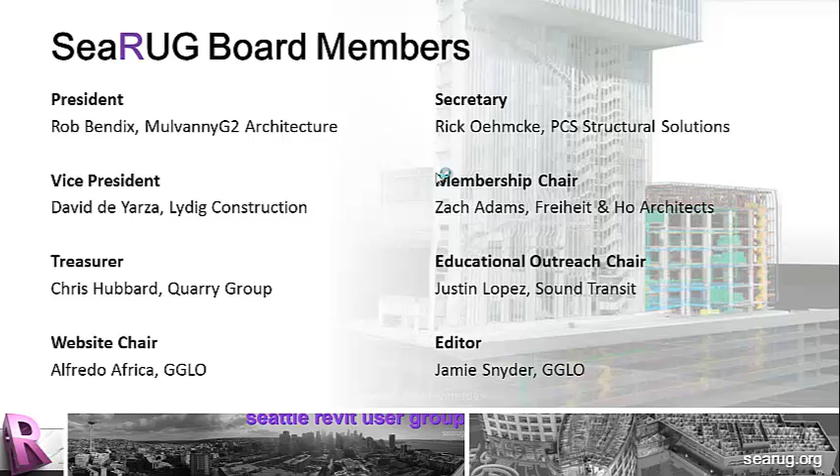All right, welcome everybody, sorry for the late start. A little bit of setup and this and that, running back and forth, and a little bit of late lunches. But now that everybody's sitting down and chewing, I'm sure at their age you can't hear me, which is probably not such a bad thing, I guess. That's why we don't get too crunchy of food, right?

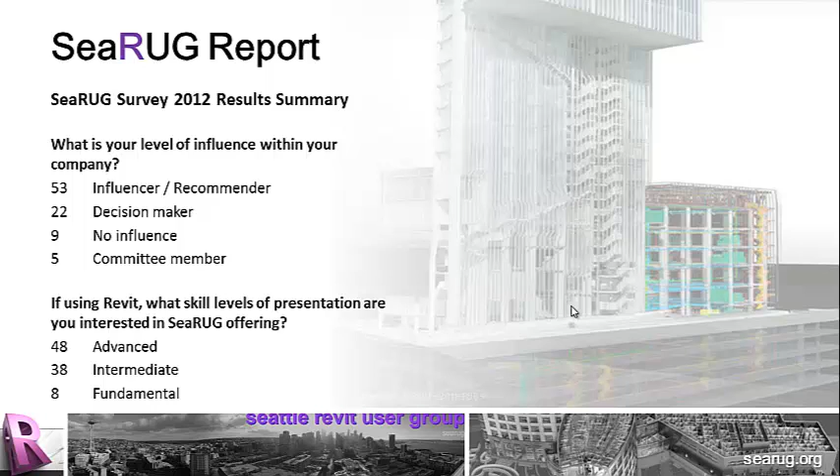This is an interesting one that didn't used to be this way - a few years ago these were flip-flopped. It's really great to see that a lot of the people participating and coming here are pushing that intermediate and advanced level stuff. So we definitely want to try our best to get as much of that in front of that group as possible, but without forgetting the fundamentals, because there's still a lot of people learning. Honestly, if you're like me and have gone back and learned some fundamental stuff, those are things we tend to forget sometimes - taking it back to basics. So sometimes the fundamentals are actually a really good thing to ground your technology advancements a little bit.

Now these are things we definitely talk to our sponsors and presenters about every year, and this is a form we give them. We say, look, this is what our demographic is, this is what our groups are, this is the people that come to our meetings, and this is the stuff they're interested in. So we definitely want to make sure we try to fulfill that request as much as possible, so that every month you come out there's always something new to learn.

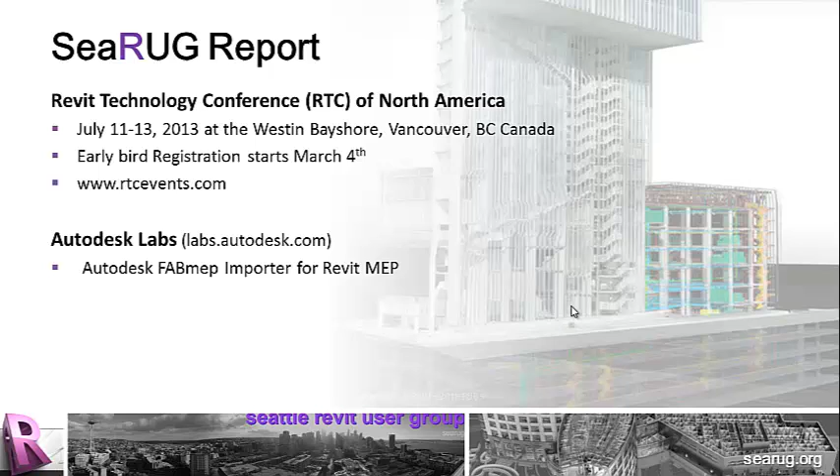FABmep Importer for Revit MEP has actually been out there for a little while now, so I wanted to mention it for those using it or working with groups using Fab MEP. Maximo integration with Revit is kind of new - I don't know many people using Maximo in BIM right now, though I know it's a very popular utility. What's great to see is tools now coming out making it easier to translate information from Revit into tools like Maximo.

Project Falcon is actually kind of fun if you're on the design side of things - wind tunnel simulation, which is pretty slick. Tools like Vasari have it, but what I find really interesting about Falcon is that it happens right within your Revit environment, and you can do analytics you can't do with Vasari. It gives you a tighter area to work within, so it's actually pretty impressive.

Chronicle is a new one I'm looking into a bit more, since I'm a design technology manager and I do videos and training at my office. This tool works with multiple products, not just Revit - it's like an AV screen capture that actually captures workflow, knowing what commands you're using. It puts those on screen and records keystrokes, so when you play videos back to people showing them how to do something, they don't just watch, they can see what's happening.

Grapevine is also a new one that's come out - a visual approach to user forums where people can post images and get feedback, whether internal or external. It'll be interesting to see how that approach goes with user forums, and of course they have an Autodesk 360 tie-in with that.

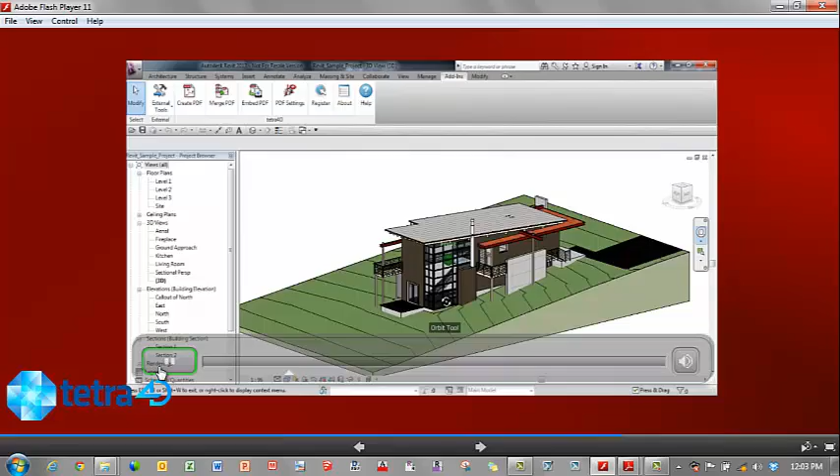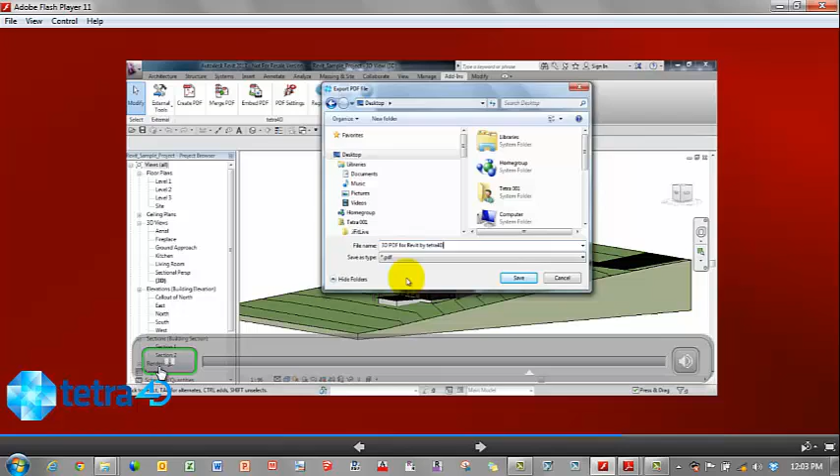With Tetra4D's 3D PDF plugin for Revit, you can easily create stunning 3D PDFs of your design data and share them anywhere with the free Adobe Reader. Creating a 3D PDF is as easy as pushing a button directly from your Revit application. Confirming from the scene manager the content you wish to publish, giving your new 3D PDF a name, and soon after, the Adobe Reader will launch, displaying your newly created 3D PDF. It's that simple. Tetra4D, the source for 3D PDF technology.

And it really is that simple. You simply push a button, you're able to create a background with images and a platform that's maybe more closer to what your profile is for your business, and then you run with that. I'll show you some other examples here as well.

So once you get your 3D PDF made, what else can you do? This is where Acrobat comes in. You don't necessarily need Acrobat to create a 3D PDF using our plugins, but Acrobat gives you so much more capabilities. For example, the plugin for Revit doesn't allow you to add a password, but if you need to protect your intellectual property, you can use Acrobat to do so. If you want to prevent people from printing or taking your images and intellectual property off that PDF, that's when you would use Acrobat.

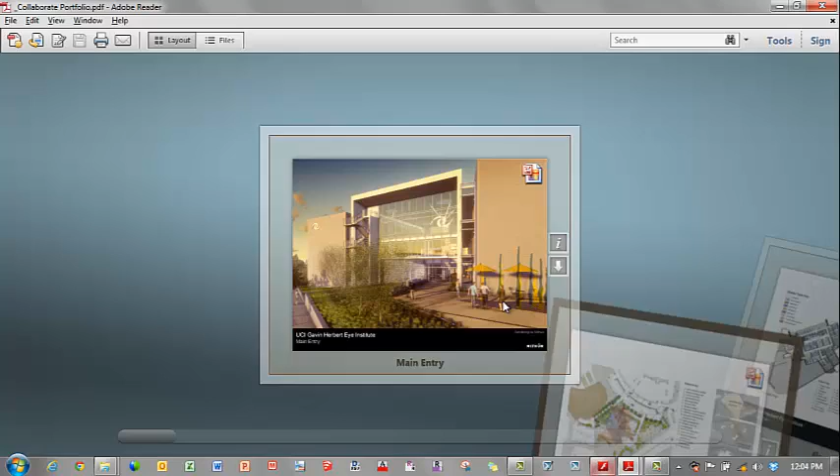We have a merge option that allows you to consolidate PDFs into one file. Acrobat allows you to actually extract and pull or add media, or do all sorts of other things, or add portfolios into those file formats. So here's some examples. This is actually a portfolio where I can cycle through each one of these images. Great tools to be able to use for presentation purposes.

As well as put video in it as well. So I'm going to pause this one here. Here's another option.

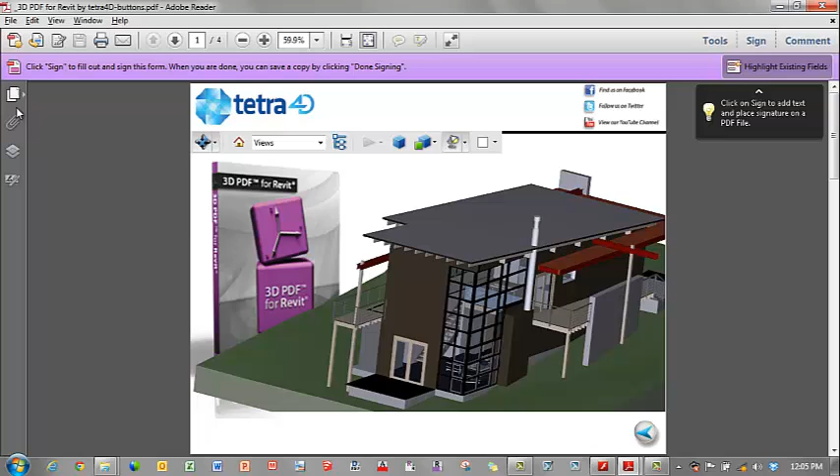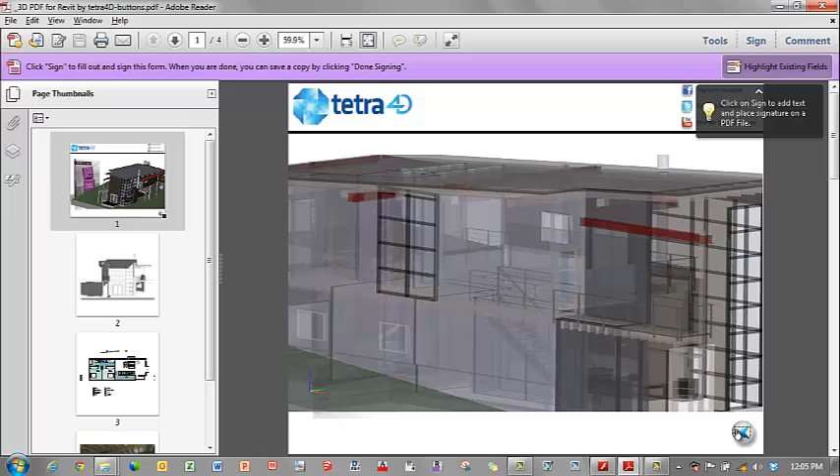Here's another PDF with the 3D environment. Here's my model. Even though I have a number of views, and these are the views that I received from Revit, I can create simple things—these are my 2D views—but I can create simple things such as buttons. Maybe I want to cycle through each one of these views, making it easier for the customer to cycle through all those views with different file formats and different rendering modes in the PDF. Here's one with a section.

It took me just a few minutes to push that button and follow through with those things. So that's a real quick example of some of the things you can do with the, let me close this guy down.

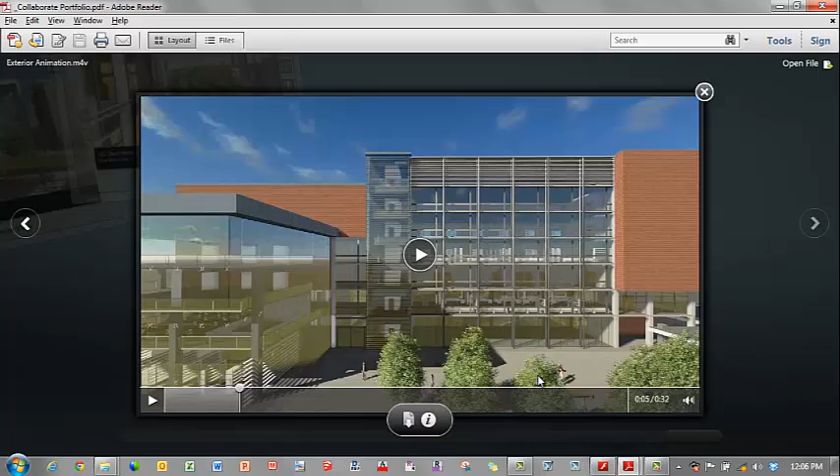With Acrobat, a couple other things: you can create content and forms, put them online, have people sign those forms, export that stuff out, as well as push a lot of information you have in Acrobat back out into Microsoft Word, PowerPoint, and vice versa. Very powerful to use Acrobat in those formats.

So how much does all this cost you? If you wanted just a plug-in, it's $199. If you're using Revit, want 3D PDF for Revit, 3D PDF for AutoCAD, or 3D PDF for Navisworks, it's $199. If you're using Maya or Max, it's $99. Straightforward, low cost. If you want Acrobat with the products, like 3D PDF for Revit, it's $398 and $298 respectively.

Just something to keep in mind as you go back home to your offices: getting the plugin and Acrobat simultaneously with us will be less expensive than upgrading Acrobat on your own. So just FYI. That's it.

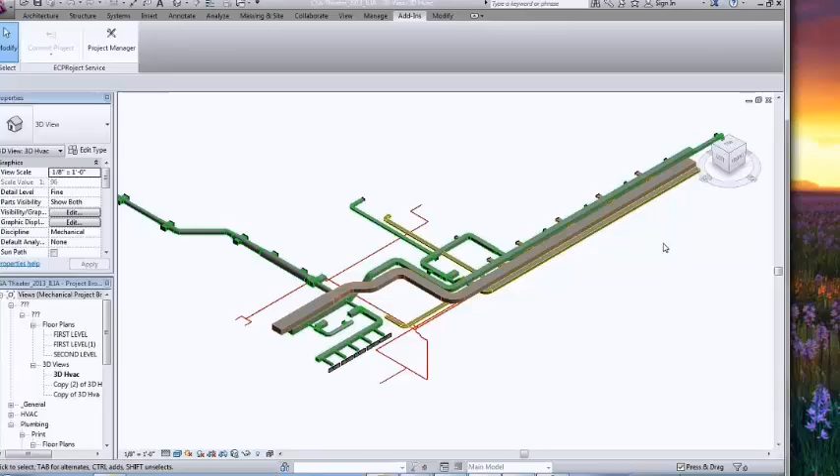But I'm first going to give you, I'm going to kind of go outside of what I had planned to do. Let me see about controlling this. I'm going to show you here. This works. This is today.

This is a Revit MEP drawing. Now up here you can see it doesn't have all the other elements to it, all the other objects, because we filtered all that other stuff out. This is from the perspective of a heating, ventilation, air conditioning, plumbing, piping contractor's perspective, because that's what we care about when we see a Revit MEP drawing.

So as you can see, this is Revit MEP. This was an average MEP design. It was a real design.

What I'm going to show you today is where the future is going incredibly quickly, because I'm going to suggest some things to this Revit users group today that you could argue with, that you could debate with. But I believe there is a shift taking place inside of Autodesk, and whether I'm right or wrong, it's my personal opinion, but there is a shift, and we'll talk about that shift and the role Revit MEP is going to be playing in the future.

I'll tell you right now what my suggestion is, and what you'll see throughout my presentation today is that the shift is going where you would expect it to go. It's going into data - the elevation, the harvesting of data from authoring tools, above things that restrict the user, restrict the design, restrict the process, that make it hard to accomplish what we're trying to accomplish today. This is happening today, and this is what you're going to see in this demonstration.

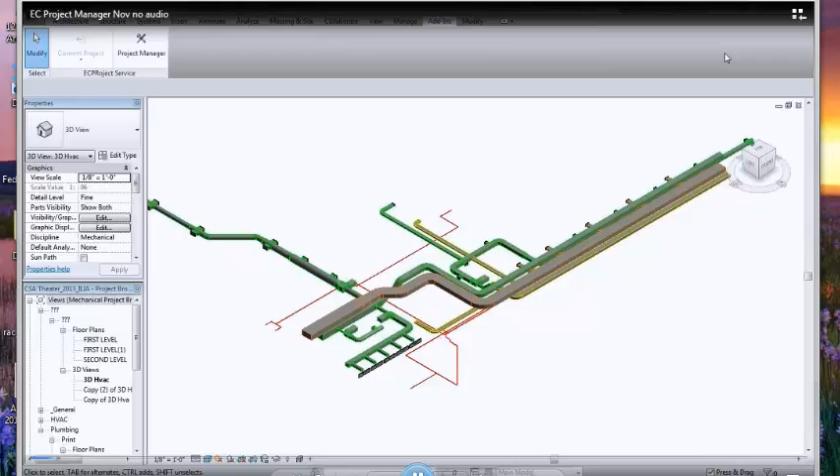Anyways, back to this little demonstration, which is the process by which we take a Revit MEP model, harvest it, and create an aggregated database. So here we go. As we're going here, you see in the top left, Project Manager.

So this is that aggregated database. We're creating it from inside of Revit MEP. We could create it from a console outside of it in this database, but we're doing it just because it's easy to do it from where you've got the data to begin with. So we're defining the name of it.

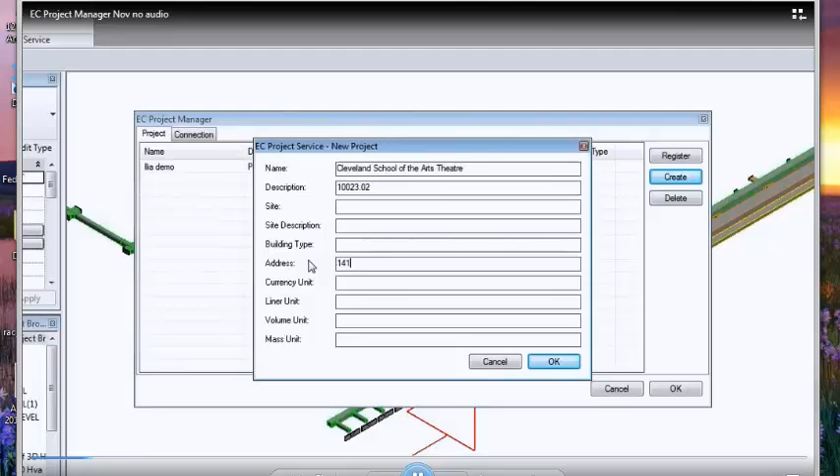We're going to cut - this is not going to be a long demonstration, we're just going to cut to the chase on it all. But here we've created this Cleveland School of the Arts Theater project. So it's created in Project Manager. Now what we're going to do is we're going to register it.

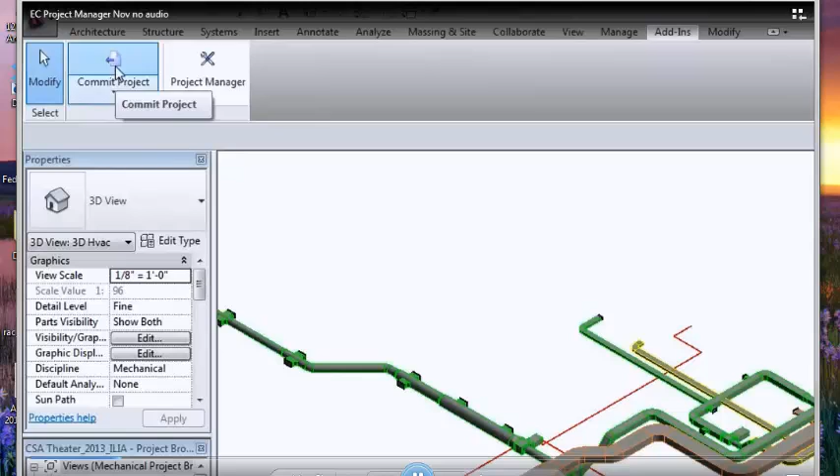This is creating a link between this Revit MEP model and this aggregated database. Then we're going to commit the entire project to it. In this process, it's pushing all of that data up, harvesting it, or elevating the data to it.

Very quickly, I told you we jumped through some hoops here, but nothing you didn't just see - it was more of a time hoop. Now we're basically going to be bringing into AutoCAD MEP all of those objects. We're taking in the equipment, all the relative equipment, the pipe, and the duct. And we're also saying, okay, I want you to populate that first level.

In the process of populating that first level, we're also going to define a specification for the pipe we're bringing in, because AutoCAD MEP, as a tool in the BIM process, is a great tool for construction documentation. We're assigning it thread by weld, and now we're going to finish it. This is exactly what you get - I'm going to stop as soon as it populates.

And there you go. This is my proposition, or my supposition, to all of you. This is what we do today. This is what my software does. My goal today is not to...

...promote and sell East Coast CAD/CAM solutions. My goal today is to bring to the folks that are in the heart of building information modeling - everyone knows the Northwest, Southern California, and other pockets in North America are rich areas for BIM processes. We all know that. So the opportunity that Rob presented to me was to come and share with you all the fact that building information modeling does work.

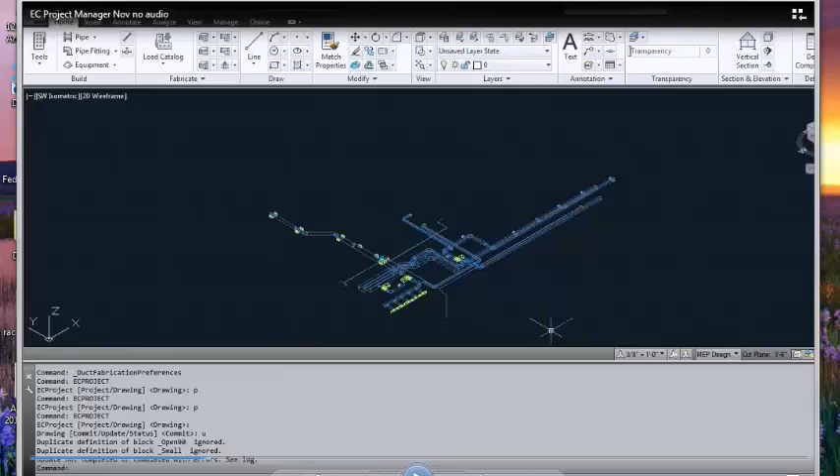And there are incredible efficiencies. Let me show you what those efficiencies are. I'm going to put this aside for a second. This is, I believe, pretty startling information here, because I'm going to drop down a little bit.

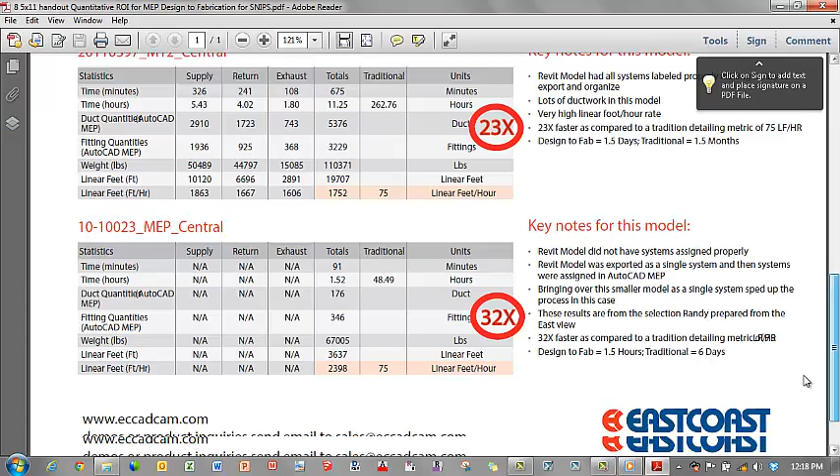And by the way, I brought with me - I don't have them for everybody here, but anybody that's interested - this particular data sheet, which is from a real customer and is quantifiably supported. In other words, we can share the Revit drawings with you. We can show you how we accomplish this. All right? This is utilizing the ability to gain access to that Revit MEP model.

That means all of you designers out there that have put effort into your Revit MEP design - if you share your models... which is one of the three reasons why we are not successfully executing building information modeling projects today, because most design firms still today, believe it or not, do not share their models. What a shame. The onus for this failure falls on the people who are advocating the use of it.

And that's the amazing part to me - the onus for making this work starts with the sharing of the model. And MEP design firms across the country still refuse, because they say, gosh, we're liable for what we put in our designs. Well, you're still liable in a PDF. What should it matter whether it's a print, a PDF, or a digital document? Who cares? Share the model.

Why? Because of this reason up here. I'm going to pick 2011-0397 - that's a real project. This came from a real customer. I'm going to go here and just show you how we utilize this.

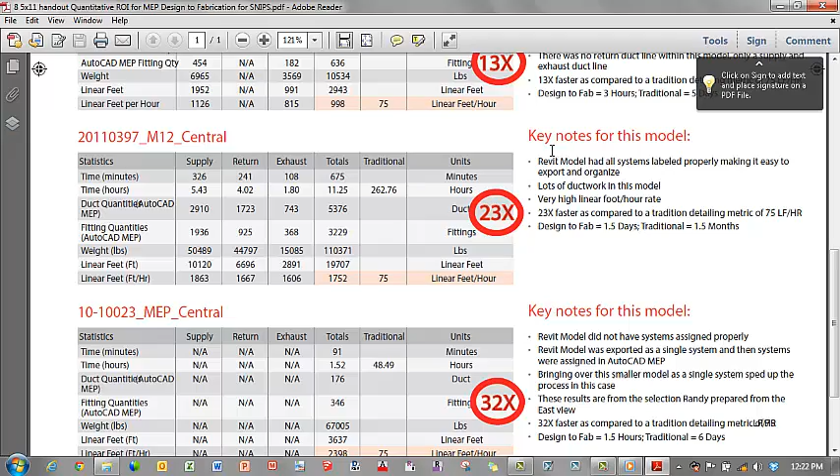And this is all supported with real Revit files, with real, actual, active, engaged Revit files. So I wanted to show you that because that's one of the major benefits of practicing a process that involves every domain, enhancing that object, enhancing that drawing through every stage with its domain expertise.

All you should be doing is the advocacy of building information, and what it's professed from the very beginning is that's what building information modeling is. One model all the way through. Not one product all the way through, one product name all the way through. That is not it. BIM is a process. BIM is not a product. Processes change. Adaptations to processes evolve.

And that's what we're going to be seeing. I suggested at the beginning that I'm going to talk to you about a shift from Autodesk. Now, who am I to speak about Autodesk? I don't work for them. I'm not privy to their strategies, but it's easy to see what's starting to happen, and I will get to that in a second.

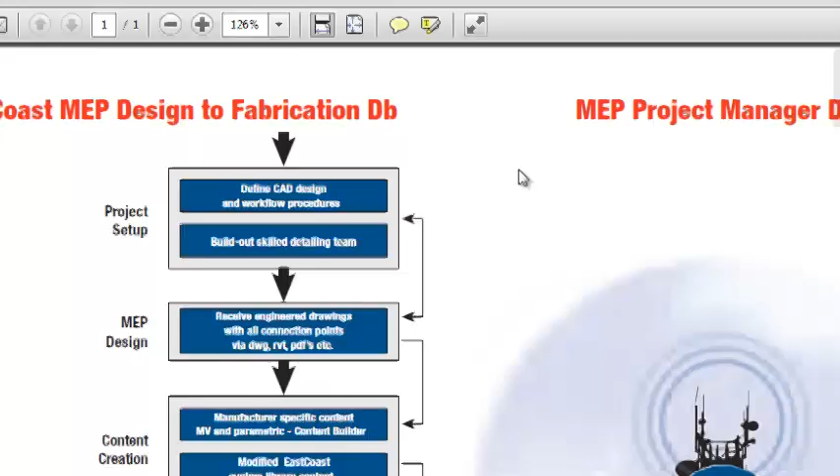What I wanted to do here is open up one last thing before we begin, and that is the other incredible benefit to building information modeling: being able to use that MEP design to bring it into a contractor's world. Now I've definitely left your world, the architects, your world as MEP designers, because at this point in time, you're participating in the building project. So you're going to coordination meetings, changes in the project specs, et cetera. What I'm showing you here is the other benefit for the constituency of the contractor.

Because now that you have rich, robust object data, what we do in technology, in a building information modeling platform, we can expand that object. So the object knows what it is. It knows it's a piece of pipe. It knows that it's a particular type of material. It knows its cut lengths. It knows where it's supposed to be. But hey, you can add all kinds of other things to it. You can add a barcode object element property set to it. And that's what we do.

We assign, at the time that the project engineer signs off on the project and says, all right, ready to manufacture, we give birth to these objects, to these assemblies, to these releases, pickoffs, whatever you want to call it. We give birth. It's day one of their birthday, at zero birth. From that day forward, we can measure really critical things.

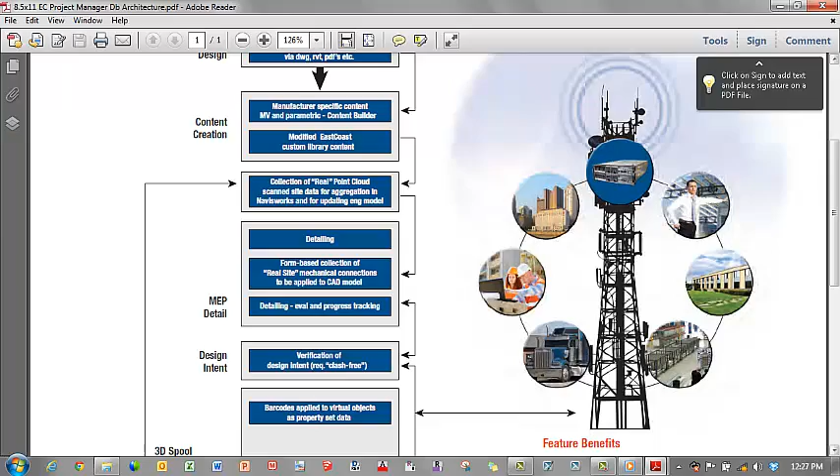But isn't this very, very much related to the advent of the methodology of building information modeling? It's taken years for people to become believers in it. It's taken years, it's a hard thing, it's a hard thing to invoke a new methodology, a new way of thinking. People say, well, you know, contractors, they never change, and architects, forget it, they never change. And it's been a long time. But Revit was designed by architects, written for architects. It's a phenomenal tool, why shouldn't it succeed? And it was, the architectural community were the first ones to grab onto it. And it was an incredibly valuable tool, and is an incredibly valuable tool.